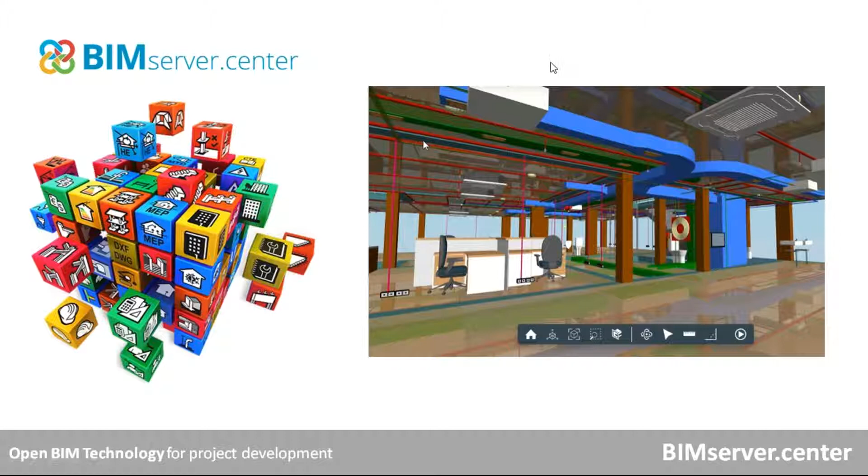Here we can see an image of one building that you can find on the website, but there are many like this, where different engineers and specialists have developed the HVAC installation, the structure, the furniture, also the electrical systems, the water equipment, everything that has to match together into a building. Because basically, for all of you that don't know anything about BIM, BIM is basically this: the combination in a coordinated manner of all the specialists that work in a building, synchronized into the same model in order to improve collaboration and reduce mistakes in the future.

Here we can see in the BIM Server Center website, the 6th tab is the store. In the store, you can find the BIM COVID-19 app, which is free. Some of the applications that BIM Server Center has are not free because they are focused on professionals, so some of them are not free, but in that case, the application that concerns us is completely free, so you can just download it and explore. There are many others that are also free.

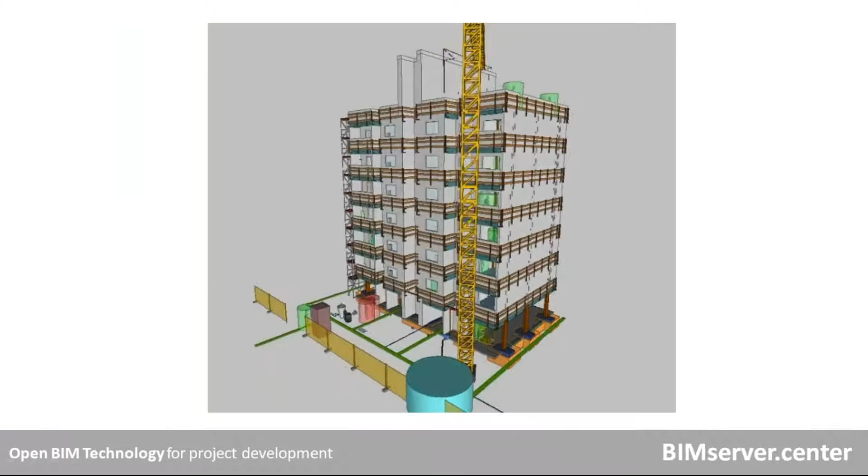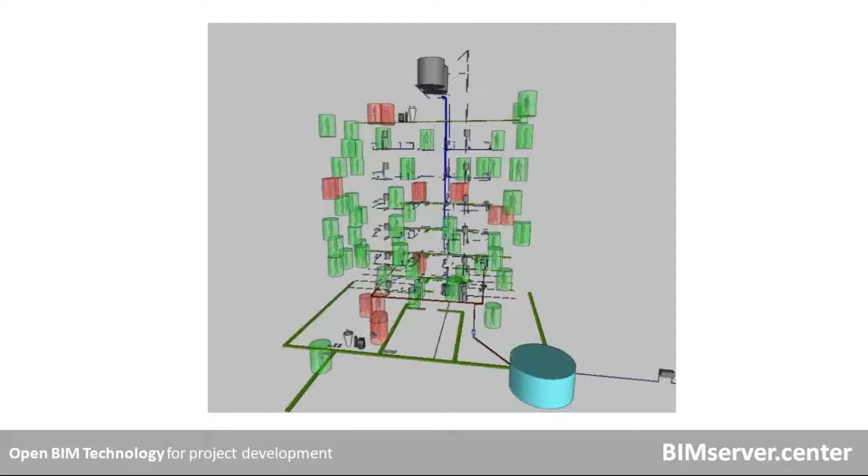Here is a video of one common building that some users, one team of users, has developed. We can see the collective protection for the construction site, all the structure also, and all the installations. You can see the plumbing and the water tank. And finally, it is the BIM layer developed by the COVID-19 software, where you can see in red where there is not enough interpersonal safety space of the bricklayers or of the workers in the construction site.

And that's the workflow in order to participate with this software. First you have to have a building, which can be made in 2D CAD, a building or a retail shop or a restaurant. Basically you have a 2D drawing that can also be an image, a JPG, or an AutoCAD drawing, and then you can import it directly to this app. It's a very easy process. We will see this workflow in the webinar.

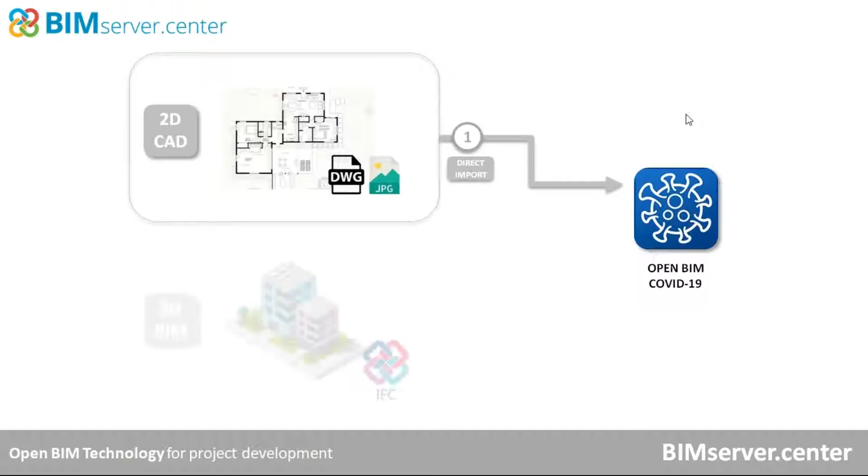Because it's probably the most basic one, and it's important to have it very clear. But there is also a very potential workflow working with 3D and BIM models, the IFC standard. The second workflow is through the IFC Builder, which is also a free app found in BIM Server Center. There is also a third workflow where you can use any software in the market, like SketchUp, Revit, Archicad, Allplan, and connect it to the BIM Server Center with an app called IFC Uploader. This app is also free.

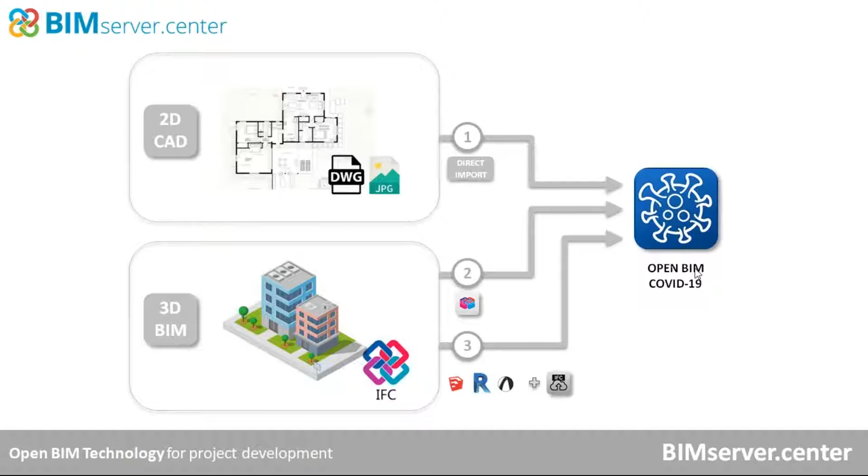Once you already have the 3D model inside the BIM Server Center, you only have to connect it and develop the model that you require for protection against the COVID-19 virus.

Now let's jump into the website and see how it looks. Basically, you only have to write BIM Server Center in Google, and it will take you to this landing page. Here you see some tabs, and you can change the language at the top right corner to English. There is also quite an interesting video here.

If you press this presentation video, it will show you a quick overview of what the platform does. We don't have time for this, and it's not the aim of this webinar, but I recommend you click here and explore it.

In a very brief way, what the website and platform does is develop open BIM projects. It also connects you to other professionals, like a sort of LinkedIn but specialized in BIM, building information modeling. It also lets you download specialized applications for engineers, architects, and construction managers, in order to successfully develop a BIM project.

Here you can see the number of registered users, projects, and applications, which is an impressive number. Now, you can register here, but since I'm already registered, I only have to put my password and I will access the website.

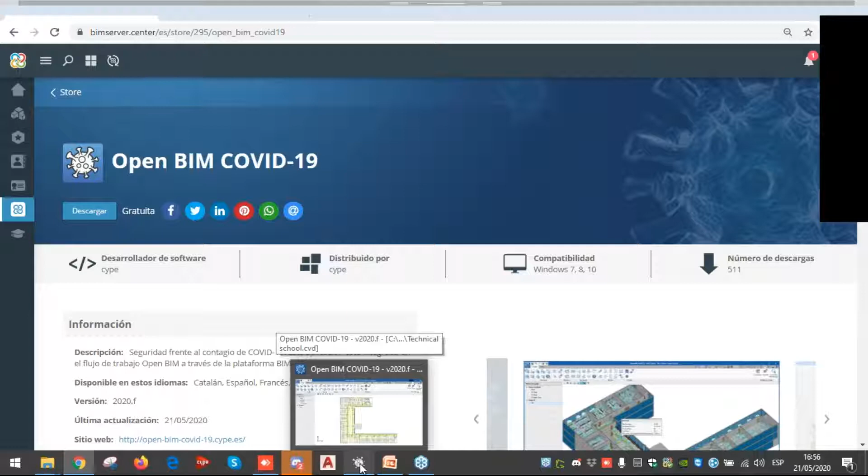And then the app this webinar is all about, the Open BIM COVID-19 app. So you go into the app, double click, and open it. Here I have an open project, a technical school.

I'm going to show you briefly the main parts of the app. At the top, we have the toolbar where you can find all the commands and tools that you might need to use in the project.

Edit elements calculation - those are the protective elements used for protection against the virus, the spaces, and this is a list of the elements placed in the project. On the left, we have all the views in the project: the 3D view and the different floor plans - first floor, second floor, third floor, and roof. In the main part, we have the view of the building. Finally, on the top right corner, you see the connection, the synchronized connection with the BIM Server Center.

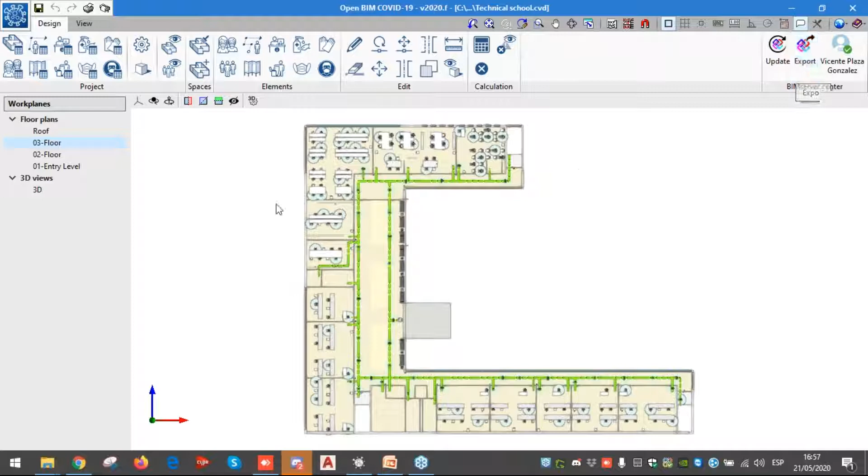You only have to click export, and then the whole model will be exported. I've clicked this option here to just enable the space part. I'll click it off so we can see the building more clearly.

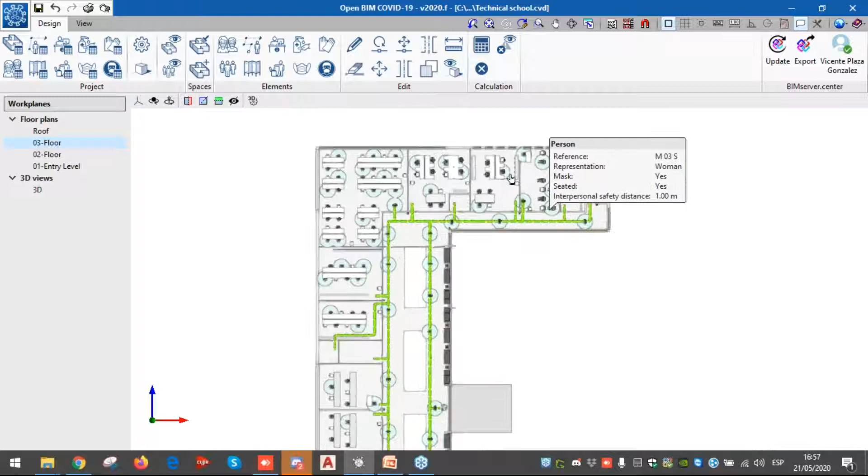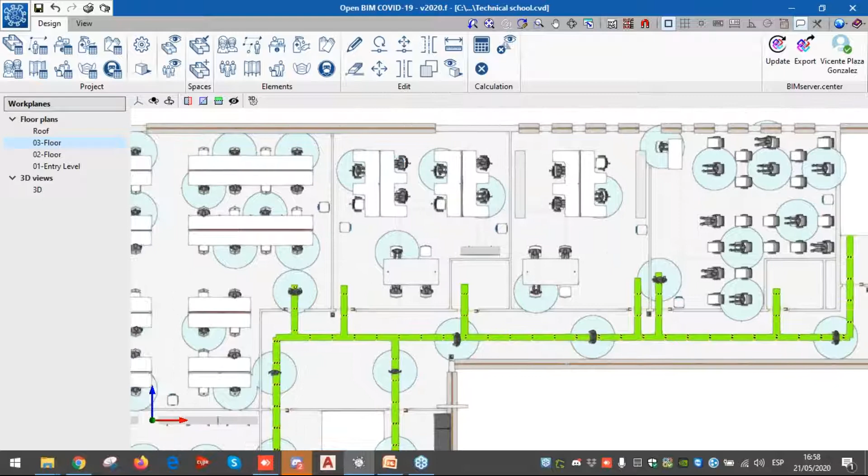If I zoom in, I can see that in this project there's already all the furniture and all the architecture of the building has already been 3D modeled in BIM. We see also the people that will be using the building, the students and the teachers, and also the corridors, the paths they have to take to enter all the classrooms. So basically we have here the floor plan of the building.

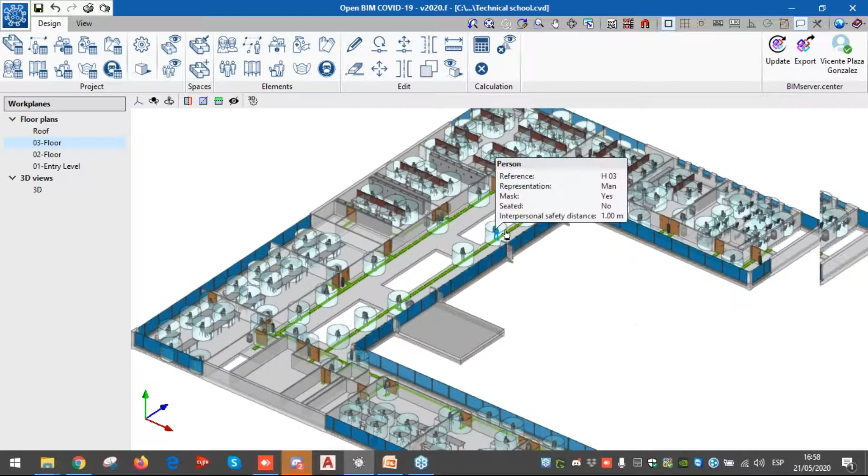If we click Shift and the middle button of the mouse, we will orbit. We see the same part of the building in 3D.

You see here that this person is cut, right? This is because of the vision range of the third floor, where we are now located, but in the axonometric view. If we double click here on the left, we see the level of the third floor, but we can also change the distance, the range, the top part of the range vision.

So I'll just increase it a little bit - 2.5 from the elevation level, and 0.4 to the bottom part range vision. And then here at the bottom part, we see the layers of the file.

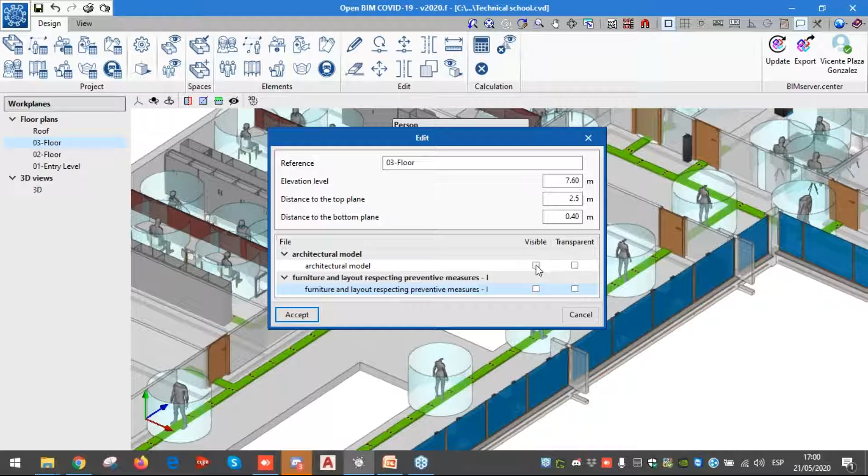Here we see the architectural model, but also the furniture in the building. We can just click it on and off if we don't want to see this layer. This is very important because if we work in a BIM model, there might be maybe 20 layers - all the installations for plumbing, sanitary systems, the sprinklers for fire design - and sometimes in order to work, we'll have to click them off to enable a cleaner view.

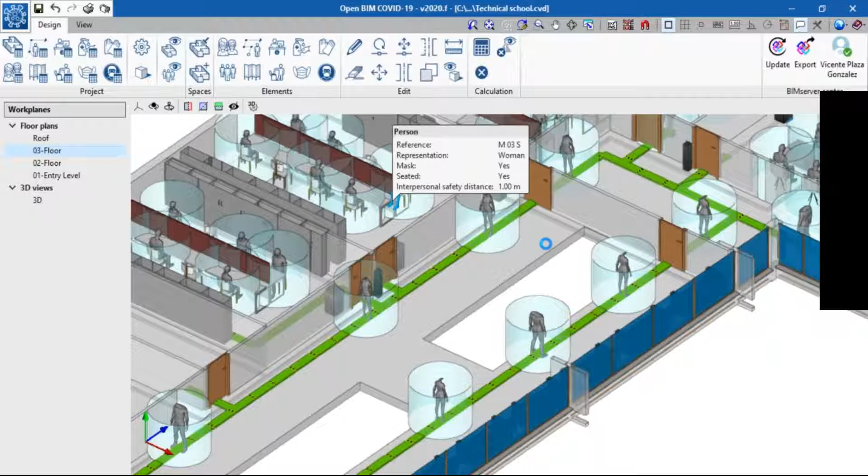So I've already changed the top range vision of this project, and now we are - it's taking a little bit of time, but it's fine. It is a very big project, with a lot of hundreds of square meters, so it will take a little bit of time, but I can explain now. So now the top part vision has been increased.

So there we can also see in the model that each person has an interpersonal safety distance - this blue circle all around them.

The program will calculate, with this button over here, where there is overlap between the different interpersonal safety distances, in order to check and assure that there is enough distance between the occupants of the building.

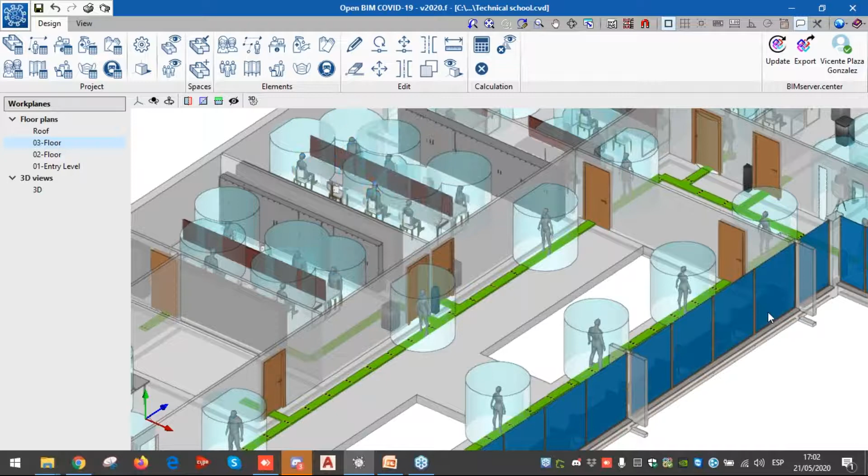Then also you can see these red panels over there - those are the separators. These separators can be used to increase the occupancy of the building, because they can limit a little bit the interpersonal safety distance.

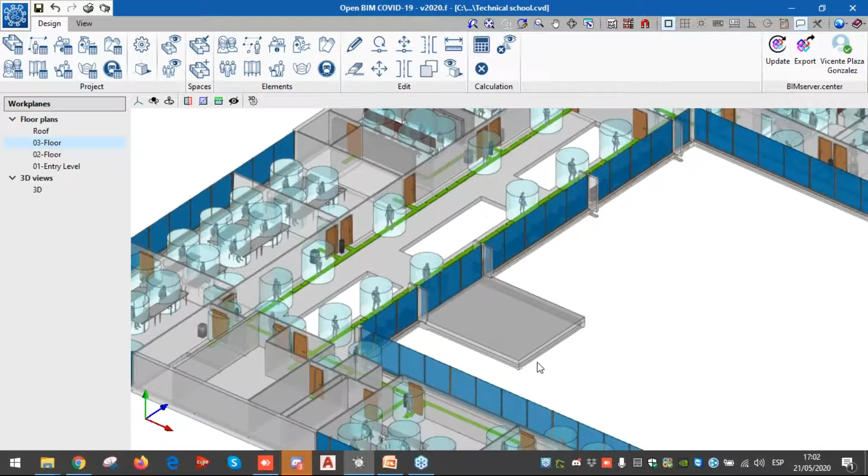Okay, so this is the same as all the software - we can zoom in and out with the scroll wheel of the mouse, and well, this is basically it.

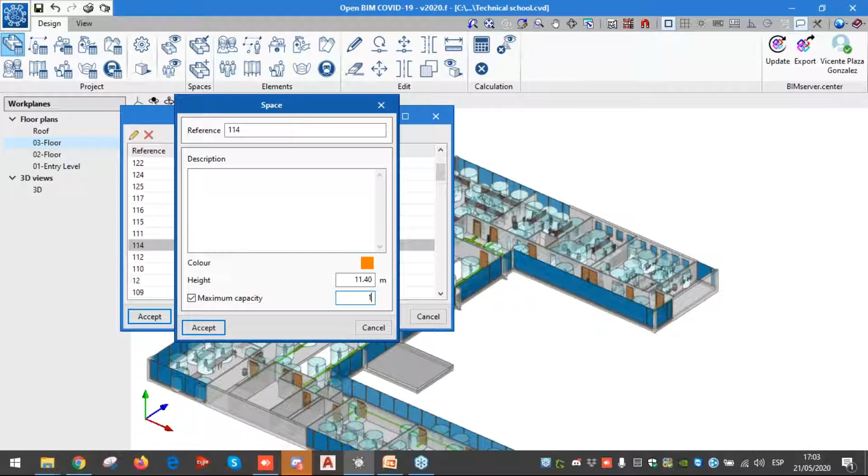And then in here, in these part projects, we see the list of all the elements placed in the project. For instance, in spaces, we see the list of all the rooms that this school has, and we can edit them - we can see the height of the room, the maximum capacity. We can click this option and say, okay, I want room 114 to have a maximum capacity of maybe 10 students. So I can just check that, and then the software will automatically calculate, with this calculation button, whether we have exceeded the number of occupants in that room.

Then, well, in people, we see all the coordinates, and also each of the person and people that have been placed in the project. If we double click, we can see if there's a woman, if they have a mask, if it is seated.

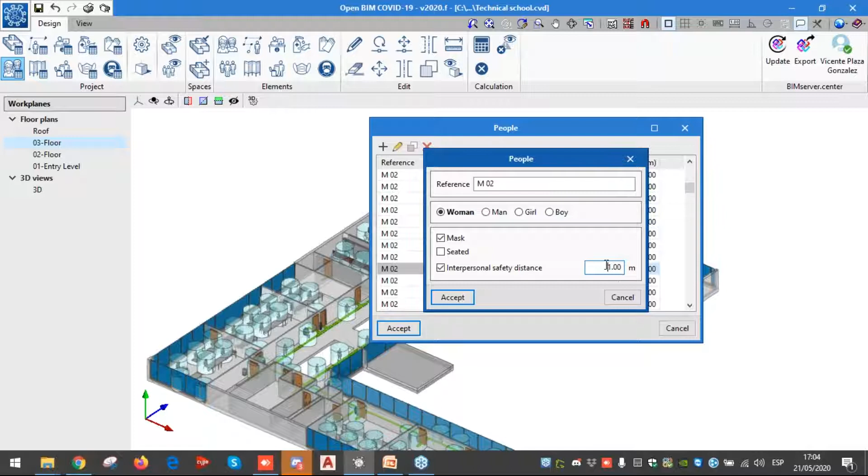Also the interpersonal safety distance, which we can change according to the requirements, because in every country this might change slightly, and according to the use and the business, this might differ a little bit. That is why the technician and the designer has to modify those parameters, because those will affect the calculations. And here the same.

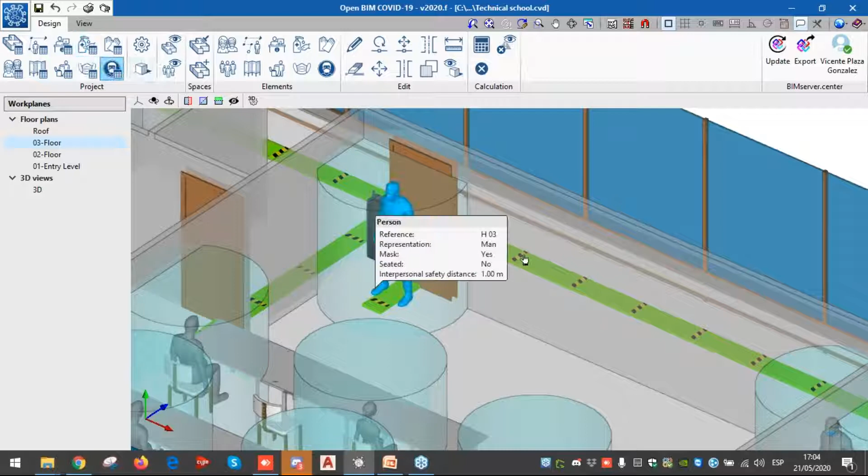So you have the list of the separators, and we can also place bins, reception desks. Also there you can see there are hydroalcoholic gels, and signs and everything. It's basically all the things that you might need in order to protect.

And this button, those two buttons here are very important. The first one, you can input the maximum capacity in every room of the building.

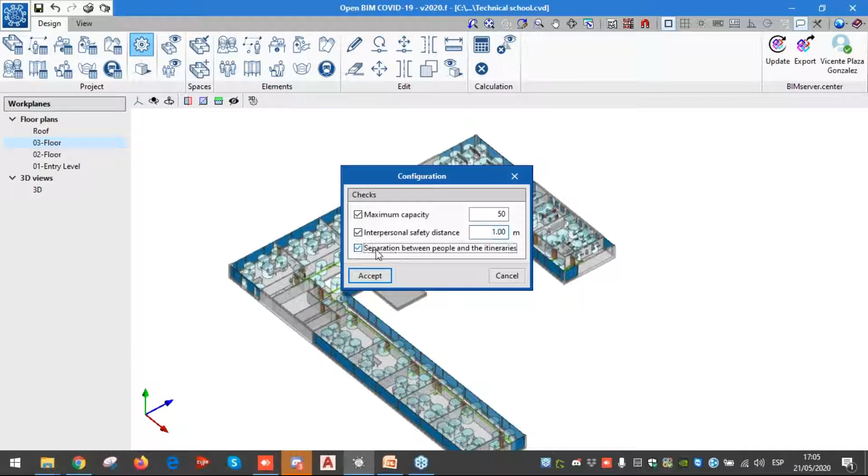So we can just limit the capacity. Also we control the interpersonal safety distance of all the occupants in the building, and also the separation between the people and the itineraries. It's very important, because with this wheel here we control all the general parameters of the whole building, of all the occupants in the building.

And there, in this little cube here, we will go to the 3D view. Now we are going to see the whole building with all the BIM layers placed together.

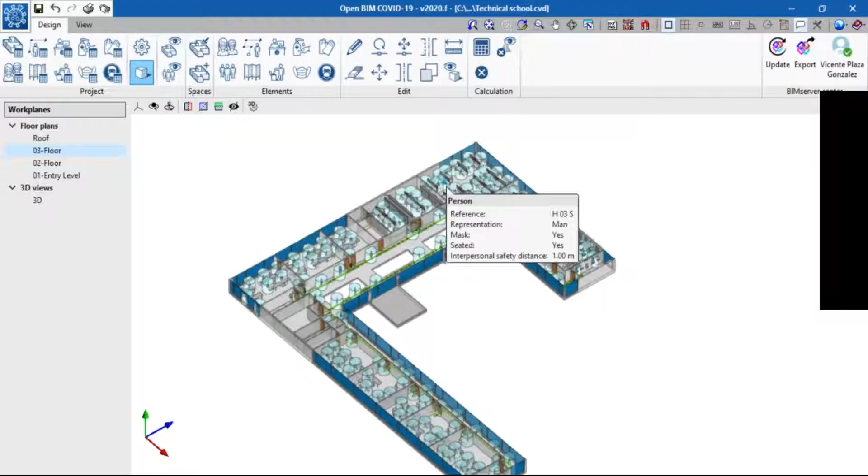So here we see the building, and over there on the left we can check the different layers that there are in the building.

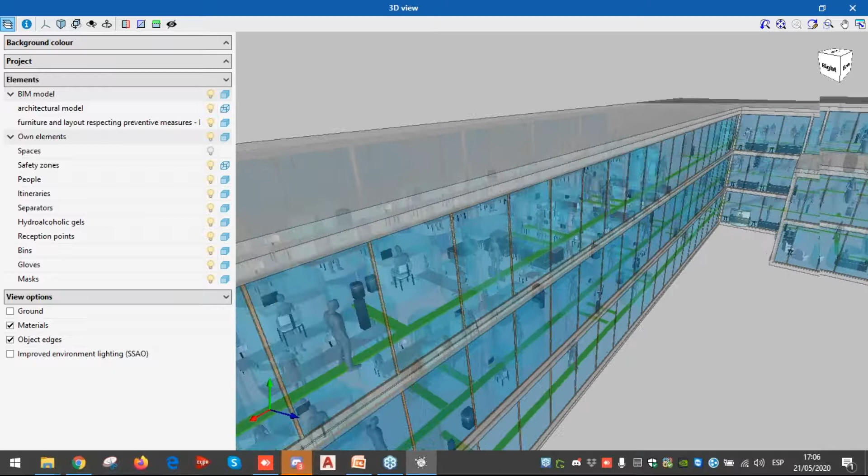So if I put the architectural model in transparent, we see what is going on inside the building. I can easily enable it, and then I will see the building without the architectural model. This is important because this building has only 3 layers: the architectural model, furniture, and the layer for COVID-19.

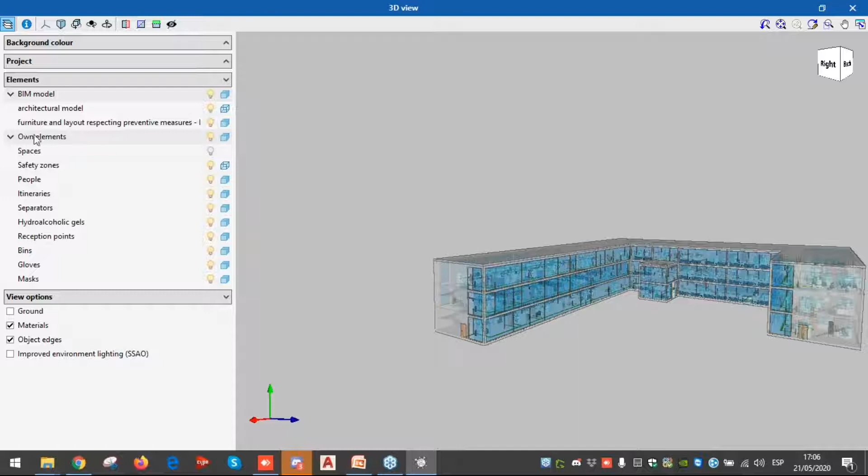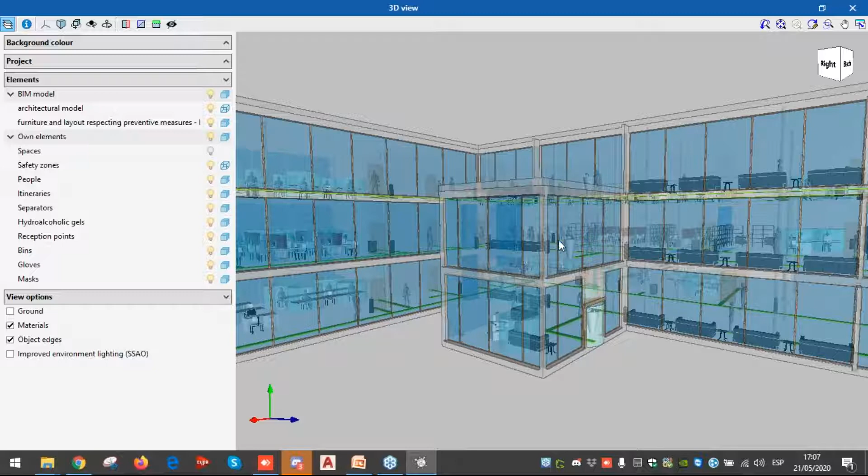But in many cases, we might have maybe 20 layers here, because the building has sprinkler, plumbing, water systems, and many construction elements that have to be coordinated, all of them, in the BIM model. So it's very useful to work in that way.

And some options here is to cut the building in the Z axis, so I can just check and explore the building.

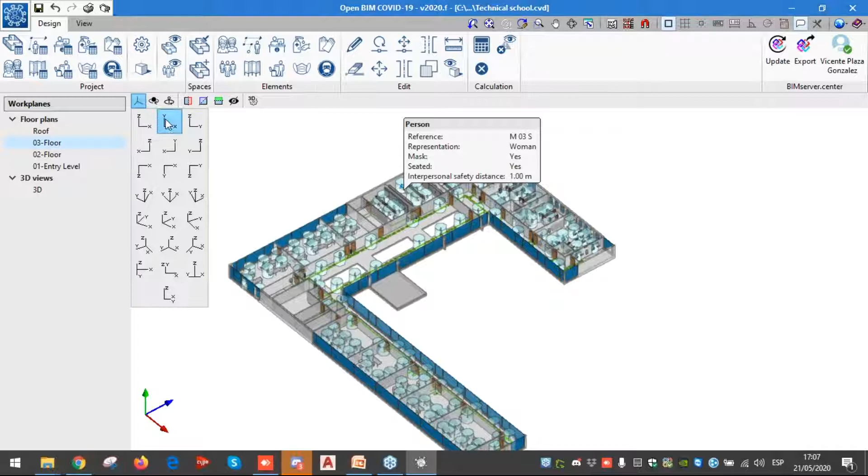But let's now jump and start a project from scratch. We click here on the left part, we just change the floor element, and in this button here we change the projection, so we see the different projections of the element.

So I'm going to do a quick demonstration of one restaurant, starting the restaurant using floor number 1. I will design the protection elements using a 2D drawing, a CAD drawing.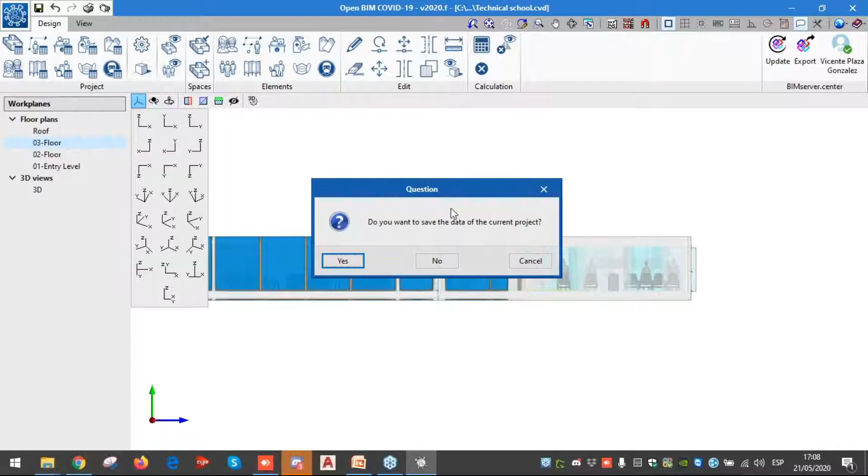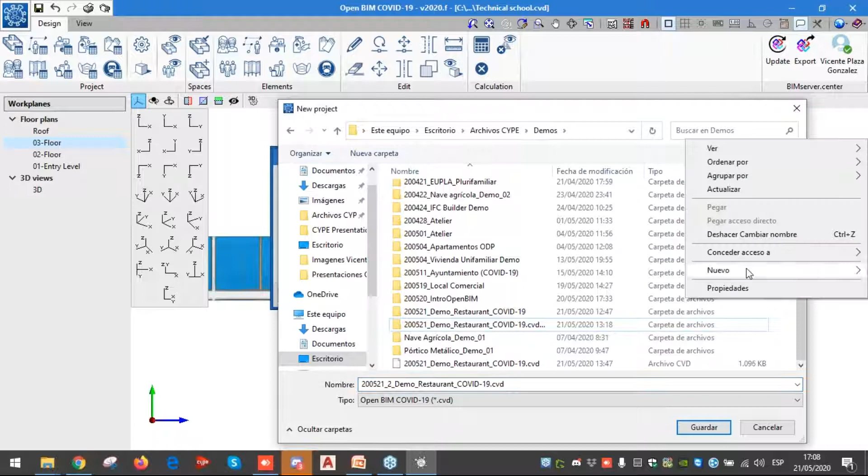I will click new, and then browse. This is where I want to save the building. I will just place it here in this folder, demos, and put it here. Okay, then we'll just make a new folder. Okay, save, accept.

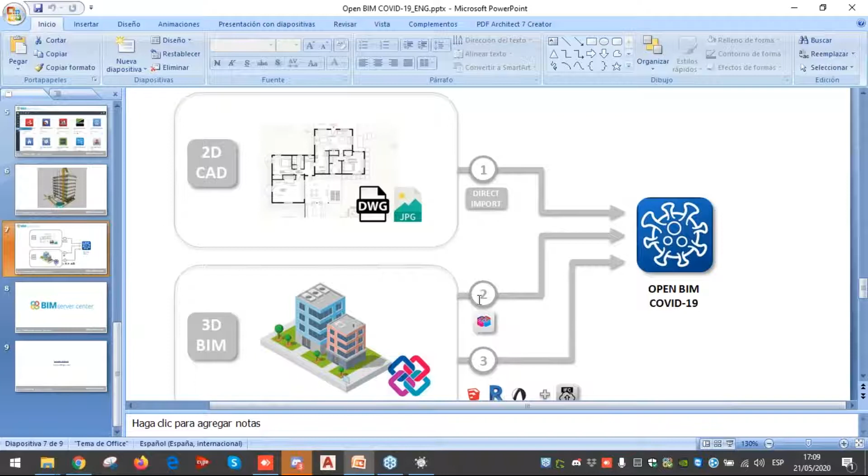I'm going to create a new project. We can also select an already existing 3D model building and just connect it with this option. This will be the flow 2 and 3. If we select project, we will be selecting an already built 3D and BIM model and connect it with the Open BIM COVID-19 app. But I'm going to start it from scratch. I will just place this type, set some options, visible, and say that it's open to collaborations. Accept and finish.

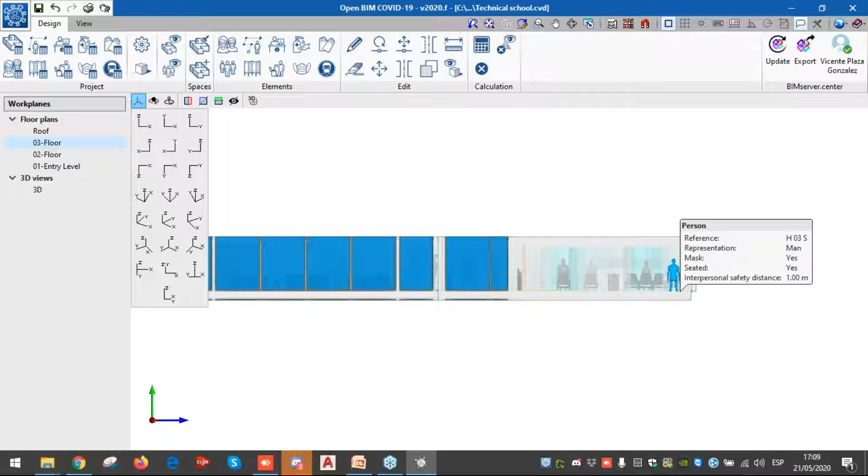And now it's opening the building. It's creating the new project.

Okay, so now we can see that we have an empty canvas. In order to import the DWG file, the AutoCAD file, we have to click this button in the top right corner, and then click plus. I have already prepared this file, ground floor for the restaurant.

It is a restaurant and an outdoor space. So I will click accept, and here I can see the CAD drawing I have. It's just a very simple restaurant.

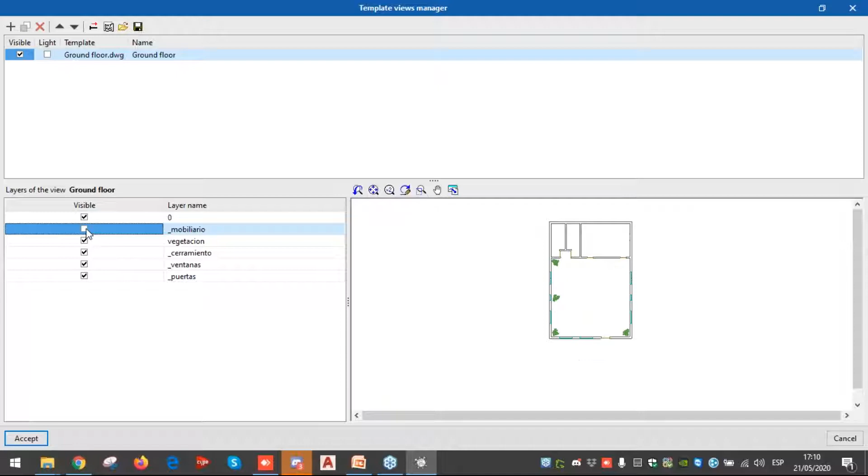Here it is in Spanish, but I can just click off the furniture and all the layers in the file. I can also, with this button here, the red and black arrow, adapt the scale of the building and the origin point. So here the building is located, the origin in this corner, in the left bottom corner, which I think is great. But I will also be able to change that.

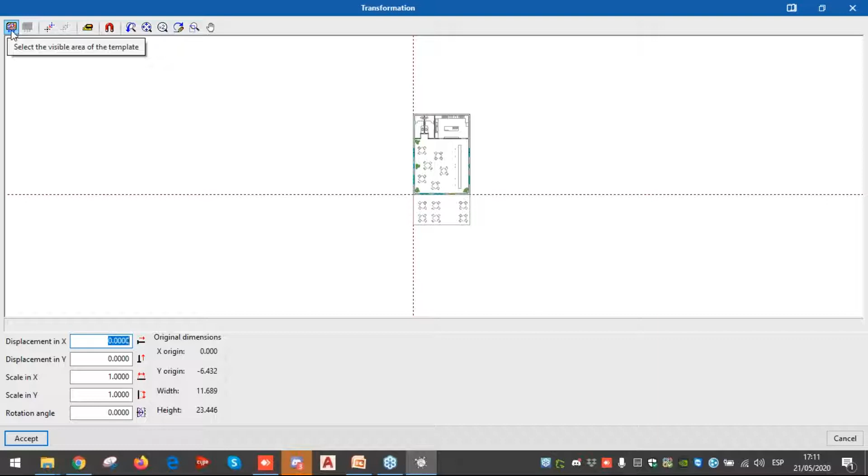I can also change the visible area of the building with this option here. I can change the origin of the template, and adjust the scale of the template. So if I made a mistake in the AutoCAD, I can correct the scale here. I can adapt it, click 2 points and type the distance between those 2 points, and automatically the software will scale the CAD drawing. We can also do it manually in X and Y, but it's a little bit more difficult.

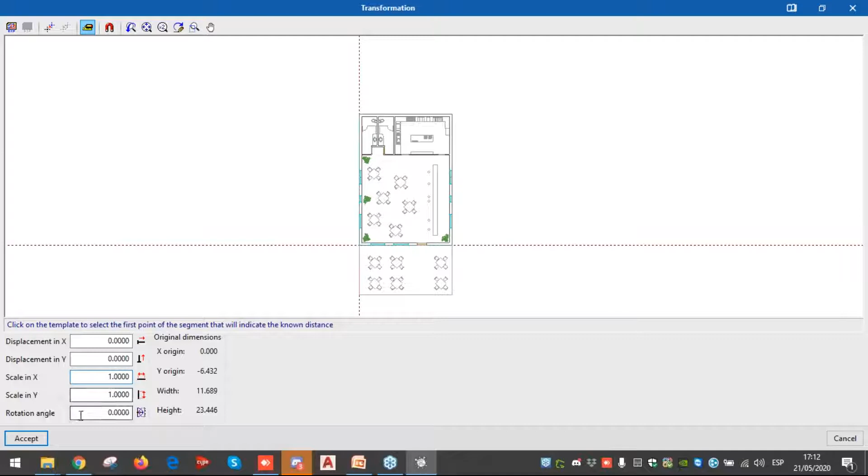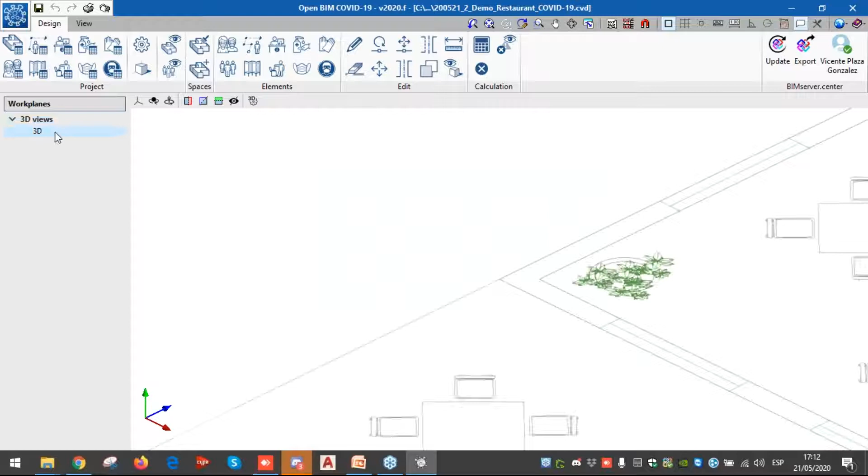The same can be said about the raster files, JPG files. It can be worked out in the same way as AutoCAD files, so it's really simple. And once we already have the loaded CAD drawing, we can also click this button here, so we will be able to see it in the white canvas. So now I click in the 3D view, and I see how the project is already placed, the AutoCAD drawing is placed in the model.

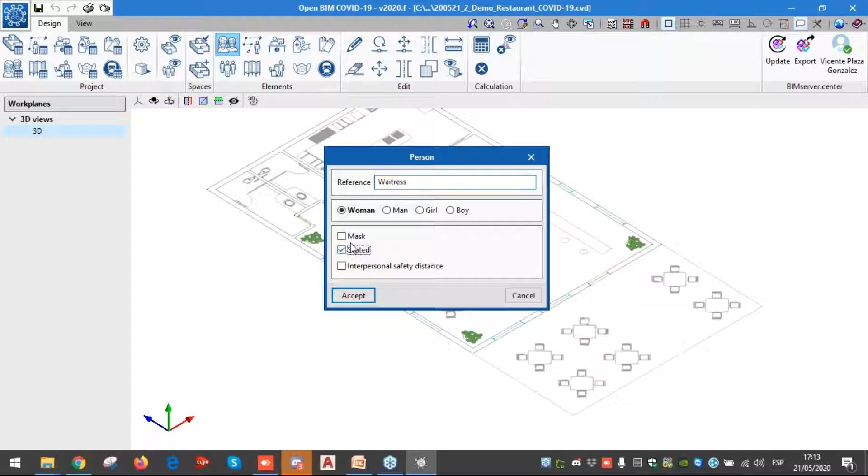So I can now start placing my elements. I'm gonna place a waitress that will have a mask, it will have an interpersonal space of 0.75. So 0.75 plus 0.75 over the person in front, it will make 1.5.

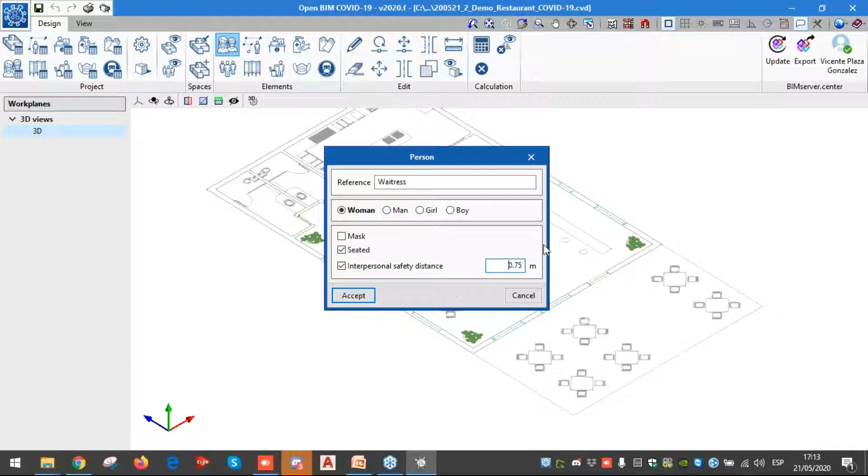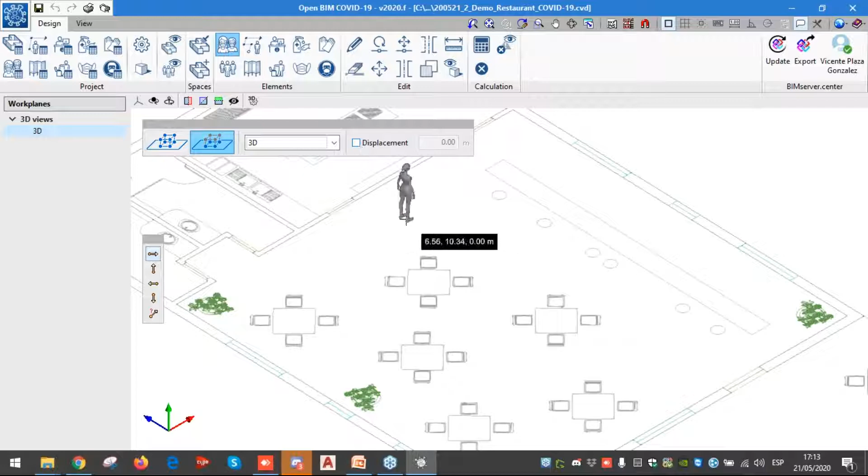The interpersonal safety distance that is considered appropriate in Spain, but this might differ in some countries. I click accept, and I just add this. I will put the person standing. I select to place the person in this 3D mode. So we have here the waitress with the mask, and the blue circle is the interpersonal space.

I'm gonna place a few chefs, just one chef, of course, with the mask also. Over here, I can change this with these arrows here. I change the direction, and I can even rotate it, say for 45 degrees. Okay, great, like this. I'm also able to click it and click this arrow, to rotate it like this. So we've seen the chef, and this might be the chef assistant.

So with this pencil here, I will just click it and write 'chef assistant'.

Okay, so I'm gonna place quickly a few customers that are seated inside. So seated with no mask because they are eating, and then I will place them at 0.4 because they have to be seated. So it's a little bit like this. I'll just check. Okay, fine.